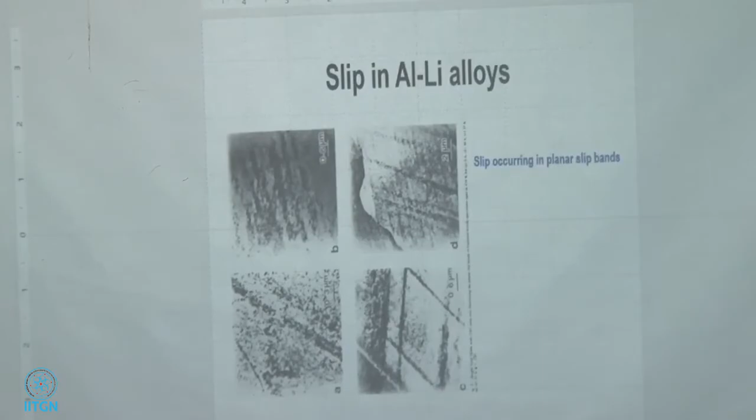Okay. I don't see him yet. Okay, well, maybe, okay let's see, okay that doesn't matter. I mean, well, Shinde is not there. Should I bring this up afterwards? Okay, maybe I'll bring this up after they come. Okay. In the meantime, what I will do is okay.

Aluminum magnesium alloy. So you just brought up the thought in my head. Recently, the 5000 series, 5083, stress corrosion cracking behavior. Because what happened was recently there is a push to use the aluminum magnesium alloys for ships.

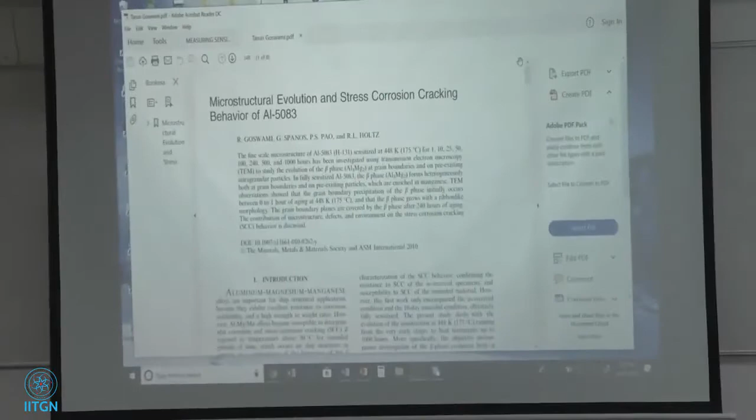This was what year was this? Let's see, I just came to 2011. This study was done by these guys. I'm going to quickly show you some of the things that may be of interest to you. I don't remember everything in the paper, but when you talked to me, I thought I should show this.

Okay, but aluminum magnesium alloys, if you make a ship deck out of 5000 series alloys, they can get very hot. The ship deck, especially in the middle of the ocean, can get very hot and precipitation could progress. So here is the as-received material, just as received, and here is the one that is sensitized. Anytime you expose a material like this to a certain temperature, I think this was 175 degrees C if I remember right. It's been about 8 months since I've looked at it.

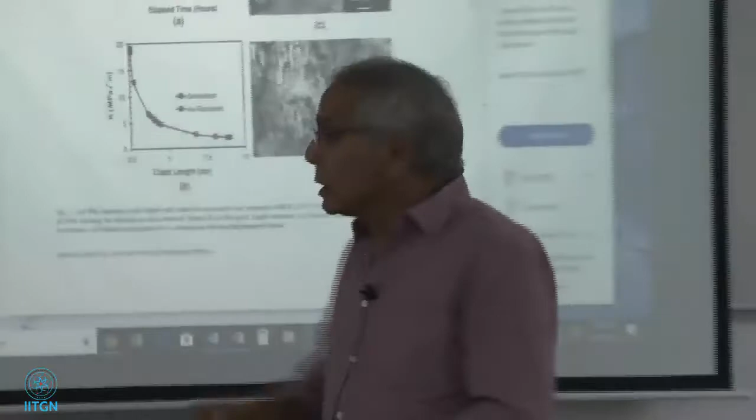Yeah, 175 Celsius, it was exposed. So like I said, when you expose this material to this high temperature, the grain boundaries, the precipitates start to fill up the grain boundaries. So you can see that the crack length is increasing as a function of elapsed time. See how long the crack length is. In the as-received material, that means the material that was not exposed to temperature, the crack length is about 2.5.

And when you do, I don't know what kind of experiments these are, but it doesn't matter. As soon as you have the grain boundary precipitates, because of the sensitization, because of the exposure to temperature, the crack length really goes up. So it could be just a specimen with a small crack, could be a dead load type of experiment, you know.

Fan is too loud, what is that? Yeah, because of the grain boundaries, there are a lot of grain boundaries in the material which are causing a reduction in the ductility. So the resistance to crack growth has gone down because the grain boundary precipitates are forming here at 175 degrees Celsius. So if you take an aluminum magnesium sample and did a crack growth test, just a simple crack growth test, you put it in the machine, put a dead load, and monitor the crack length.

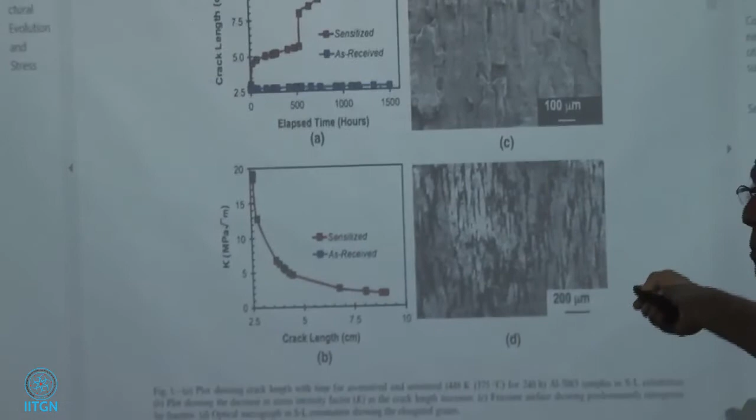Nothing happens in the as-received material, the blue ones. But if I now take the aluminum magnesium, put it in the oven at 175 degrees Celsius for 240 hours, and take that specimen and put it in the machine, the crack length starts to rise because there are a lot more grain boundaries, precipitates. Do you see what I'm saying?

So this is as received, the blue dots, nothing along the grain boundary, clean grain boundaries. This is 175 degrees Celsius, 240 hours. I'm just putting one grain here to show what's going on. Okay, you still have some precipitates, but now you also have these precipitates.

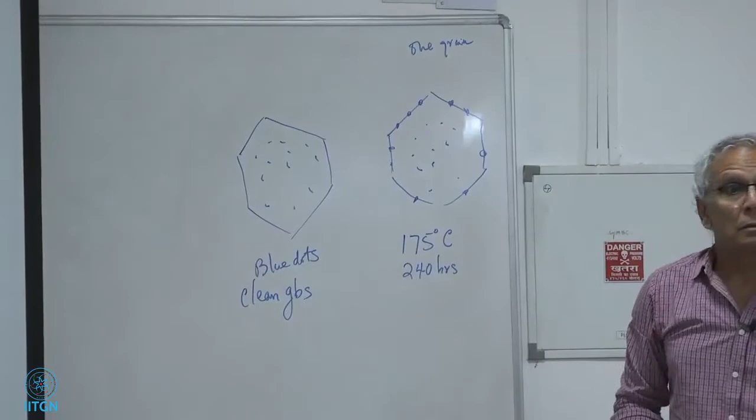These precipitates, yeah, they'll be permanent. Even if the temperature comes down, they will be there. They will stay down there. Yeah.

Well, I have to be careful when I say the word permanent, because if I put it in the oven at a higher temperature than 175 degrees Celsius, they will dissolve again into the solid solution. So it's like this: aluminum, magnesium, solid solution. I take this alloy.

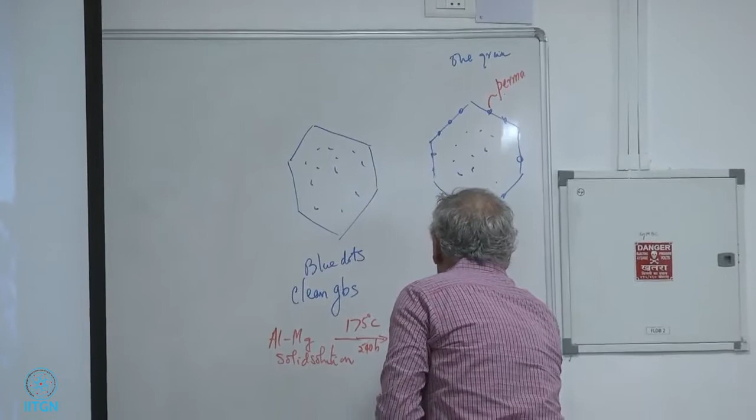175 degrees Celsius, 240 hours. I get the grain boundary Al3Mg2 precipitates at the grain boundaries. That is the chemical reaction that is taking place.

But if I go to 400 degrees C, they may all go back in again because the temperature is too high for the solubility. But if I just cool it to room temperature, they will still stay there. And if I leave it at 175 degrees for 1,000 hours, they'll get bigger and bigger. These will get bigger and bigger.

No, this one is different because one of our lecturers is thinking of working on 5083 alloy. So we had a discussion outside, and I thought I should show him a paper that will be useful for him. So what I'm saying is that 5000 series aluminum alloy has got a very low density, low weight.

So people in the ship business, the Navy, were thinking of using this material for ships. And then the question came up: if in the middle of the ocean, where it is exposed to high temperature for a long time in the sea, what will happen to this material? The conclusion was these grain boundary precipitates will form.

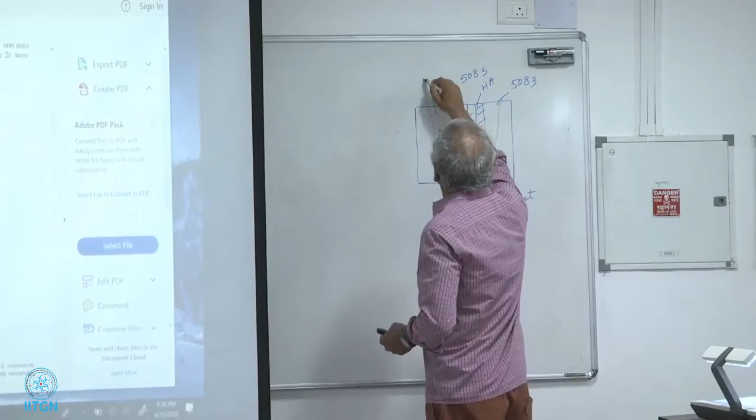Of course, you can draw it like this if you want. It doesn't matter for our discussion.

So when you are doing this, what I would do is put a thermocouple. This is not necessary to put a thermocouple here, I would not- that temperature would be high. But if you put a thermocouple on this side, and see what temperature it goes up to, it will be nice to know what your temperatures are. Then you can forecast whether you're going to see whatever those precipitates are. I'm sure this Al3Mg2 has got a precursor.

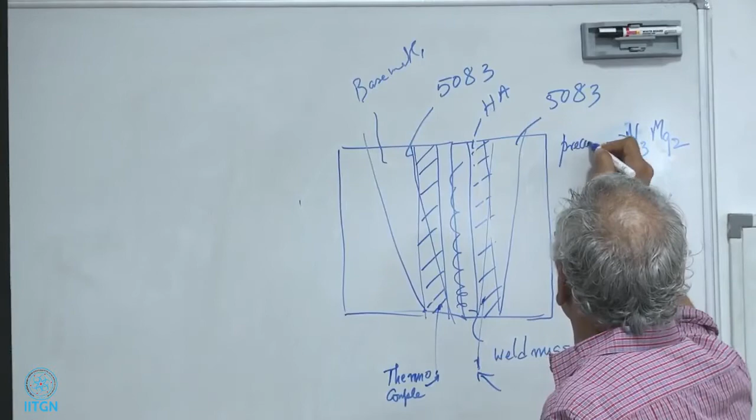So after you do all this, then you take a section, cut it perpendicular to the friction stir weld, FSW axis, whatever it is, 300 revolutions per minute, 5 inches per minute translation speed, whatever is best. You make a section of that, then I'm going to have a section like this with the weld zone or the weld nugget, WN, my heat affected zone. And there is also a thermomechanically affected zone, the TMAZ.

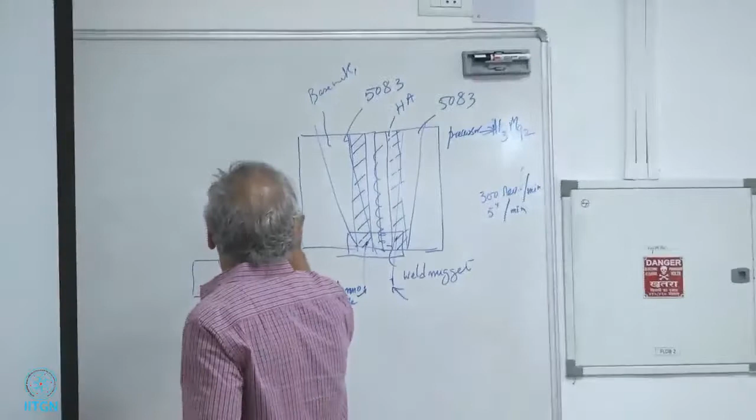Thermomechanically affected zone, I forgot about that. So you've got the weld nugget, thermomechanically affected zone, and heat affected zone. I will document all the precipitates. What are the precipitates here? You probably have a dynamically recrystallized microstructure here.

With no precipitates. I've got a paper on this one. Dynamically recrystallized zone, dynamic recrystallization. So here there will not be any precipitates in the weld zone. The weld zone will not have any precipitates.

After friction stir welding, you want to see where the precipitates are. Are they along the grain boundaries? This is as friction stir welded. So number 2, give the heat treatment.

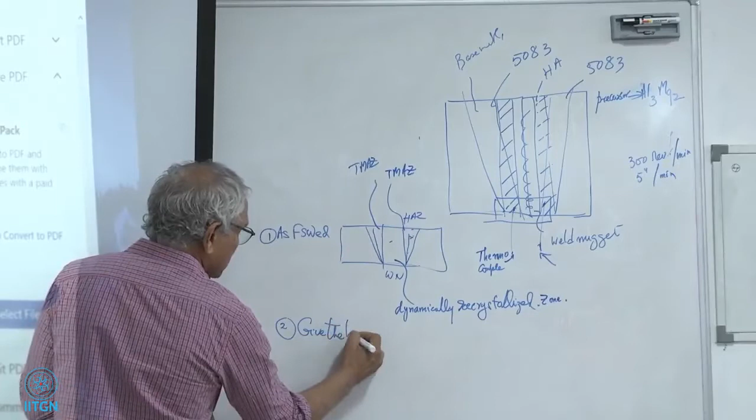Actually, before you give the heat treatment, I don't think you have a residual stress measurement. Then you can choose the heat treatment so that you can relieve the residual stresses, but at the same time, they will be forming grain boundary precipitates in this heat treatment.

When I say look at the grain boundaries, I mean image the grain boundaries. And then you can throw it in the salt bath, whatever you want to do afterwards. But that's the main thing. That's the main part of the whole problem, right?

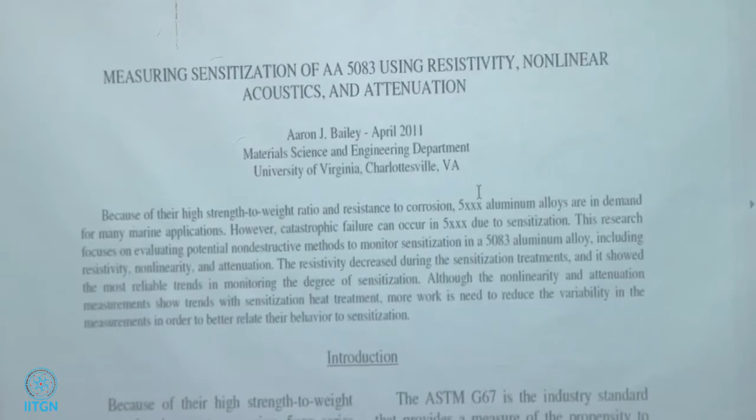See, okay, I'm trying to see if there's a figure here that will help you. Okay, that's good enough.

So then if you're interested in corrosion, you can take that one sample, small samples. You can cut a lot of samples actually, and put them in salt, take it home, mix some salt in water and throw it there. Just look at it every day, how it looks. Take pictures of it, you can do that.

So you were saying something, Chandraji? What you said about putting the salt... yeah. Right, yeah.

Everywhere 5 series alloys. Bulk of them is 5052. This is a newer alloy, 5083. Yeah, new alloy. The application is... a lot of 5000 series.

Good point. What will be the effect of the precipitates at the grain boundaries? Yeah, that's what we talked about, right? The crack growth, the cracking length increases.

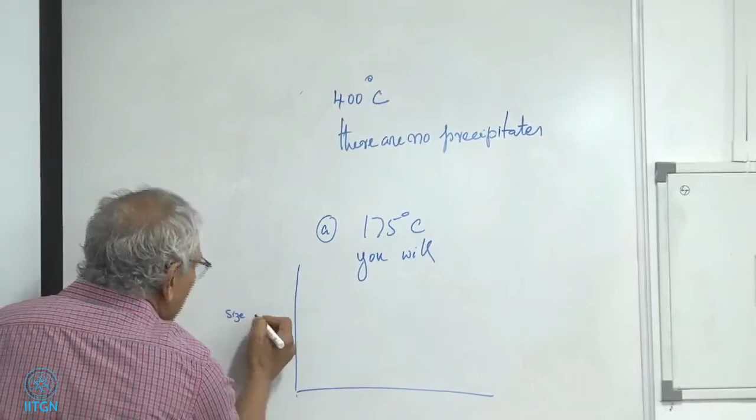Size of the precipitate - size and number, I don't know which one will change. Size and number of the precipitates, volume fraction, area fraction.

At grain boundaries, as a function of time. And I'm heat treating this at 175 degrees Celsius.

Like Sir said, this is not actually an age hardenable alloy, it's a work hardening alloy. But this can happen. This happens. That's what we saw.

So at time 0, there are no precipitates. Nothing. Then slowly the precipitates form - I'm doing it at 175, maybe 10 hours. I don't know which way the curve will go. That's what will happen, okay?

Yeah, either they may grow or the number can increase, right? So the magnesium from...

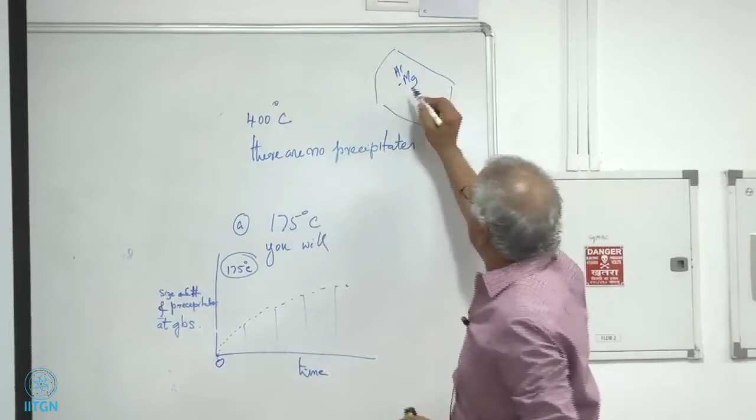There's my grain, these are my grain boundaries. My grain has got aluminum magnesium, okay? But at this temperature, my magnesium is diffusing to the grain boundaries. And it's forming Al3Mg2. So the magnesium is coming out of the solution. It's diffusing much faster than aluminum, and it's forming Al3Mg2 precipitates.

So anytime - well, I don't want to make a general statement, but in this case, they are deleterious to the material. They're bad for the material.

So we showed, right, crack length? Yeah, we showed that the crack length goes up. Yeah, so we showed the graph, right? We just saw the graph.

Yeah, that is Al3Mg2. That's intermetallic, yeah. Oh, yeah, absolutely. Absolutely, it has to.

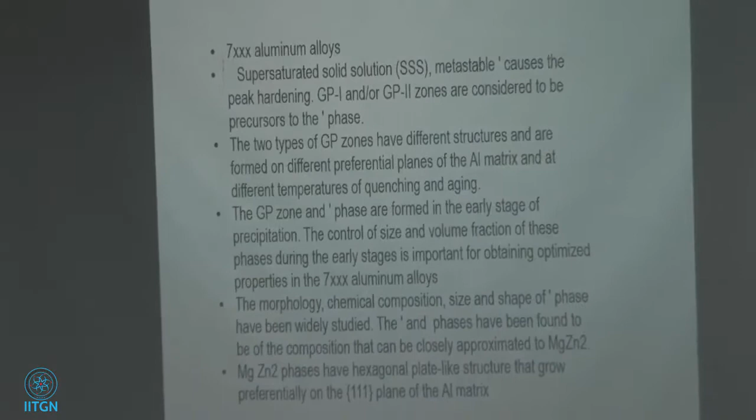So this is completely different from 5,000 material. This is 7,000 alloy, 7,000 series, which is a little bit different. This is a precipitation hardened alloy. So this alloy becomes harder, becomes stronger because of precipitates. That's how you do this, okay?

Right. So this also goes back to the question you were asking, right? So here is my supersaturated solid solution. That means all the elements, aluminum, magnesium, zinc, copper, those are the main elements. 5.8% zinc, of course it won't be exactly the same, but a little different, 2.28% magnesium, copper. As long as you remember it's aluminum, zinc, magnesium, copper alloy, that's enough, okay?

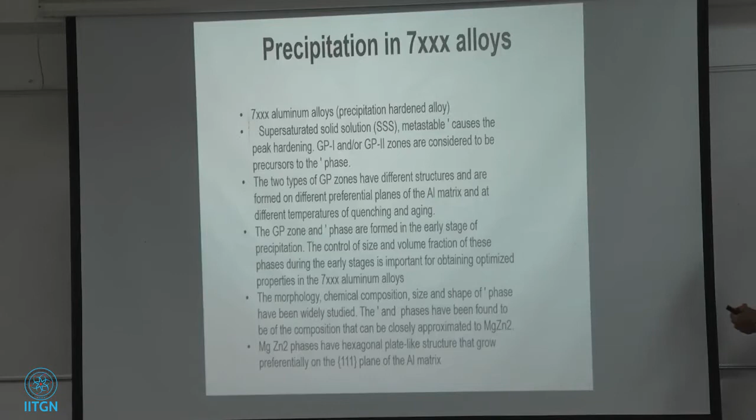I'm losing my mind. Oh, there it is. So we are doing supersaturated solid solution. Let us say we heat treat this at 120 degrees Celsius for various lengths of time, just like we did before. Hardness versus time, or this could be yield stress, or anything, whatever you like. Okay, that's the curve, right? Underaged, peak aged, overaged. Yeah.

So here, just before, the GP zones come out, GP1 and GP2. These are Guinier-Preston zones. They're really not precipitates, but they're a collection of atoms, maybe 15, 20 atoms, okay? They're forming the nucleus for the next precipitate. They are considered precursors to the eta prime phase. Okay, this is all fine. Size and volume fraction changes, fine. That's all fine. This is the eta prime.

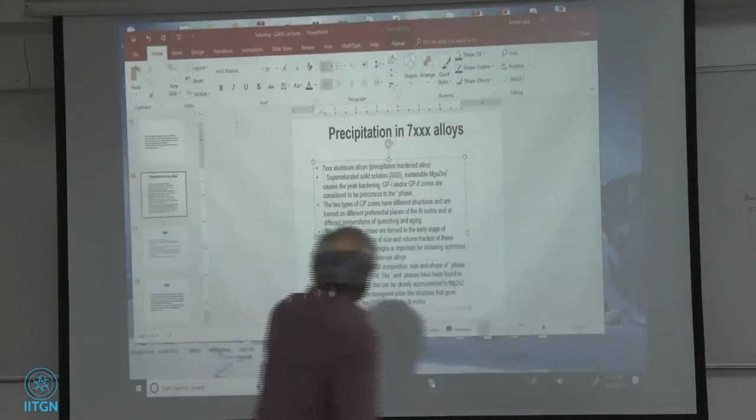And the only thing is, this is important, they're hexagonal plate-like structure and forming on the 111 plane, because that happens to be the slip plane for aluminum. Okay, so they're sitting on this slip plane. Remember always, 111 is the slip plane for aluminum alloys, all aluminum alloys. 110 is the direction, slip direction. All FCC materials.

So it so happens, aluminum alloys, or that 7000 series, let's stay with that, 7075 or 7050 or something else, have the highest yield stress at peak aged. Right? Corrosion, stress corrosion cracking, not the best.

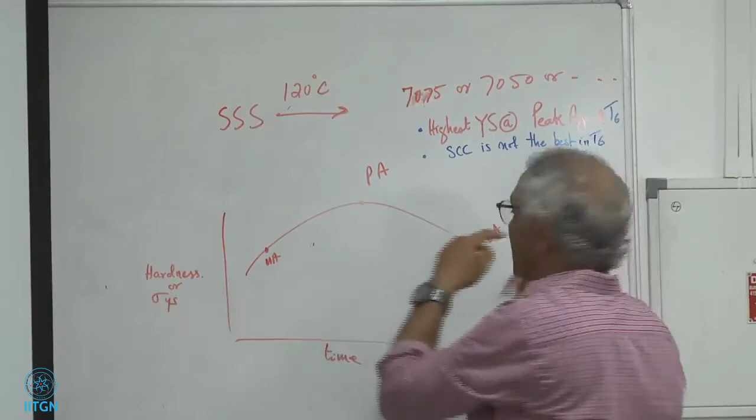Let's call this as T6. In T6 condition, this is my T6, peak aged is my T6 condition. Okay, my yield stress is very good, highest, great. My hardness is high, my yield stress is high. Okay, but my corrosion is not good, my stress corrosion cracking is not good.

Let's go here, okay, overaged. In the overaged condition. Oh, I'm writing too small. Overage condition, yield stress is lower. Huh?

But my stress corrosion cracking is high, I'm going to show you later on. So here my yield stress is high, stress corrosion cracking is low. Here, my yield stress is low, but my stress corrosion cracking is high.

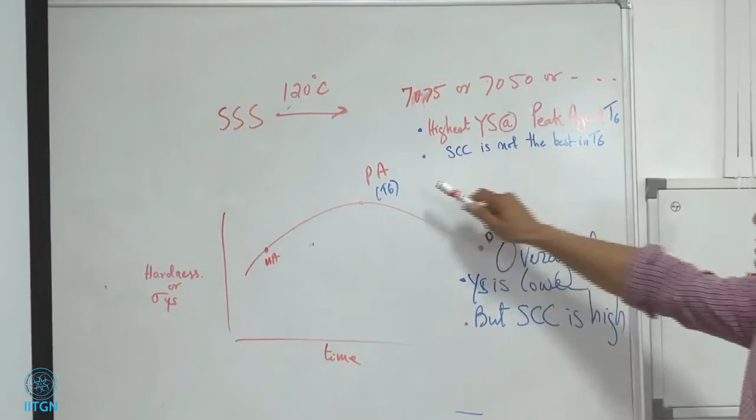But I like to use, as an aircraft guy, I like this. A lot of my products, I want these. But the stress corrosion cracking is bothering me, you know? So what I do, either repair or I go for replace.

Because in a cargo plane, there are big longerons. This is the floor of the airplane, and there is my fuselage, top of the fuselage. There's a big thing that's longeron. It goes from the bottom at a slope and it holds everything. It's like a stiffener, essentially. Big longeron, it's very big. I think maybe 3 or 4 floors high, depending on which cargo plane you're talking about.

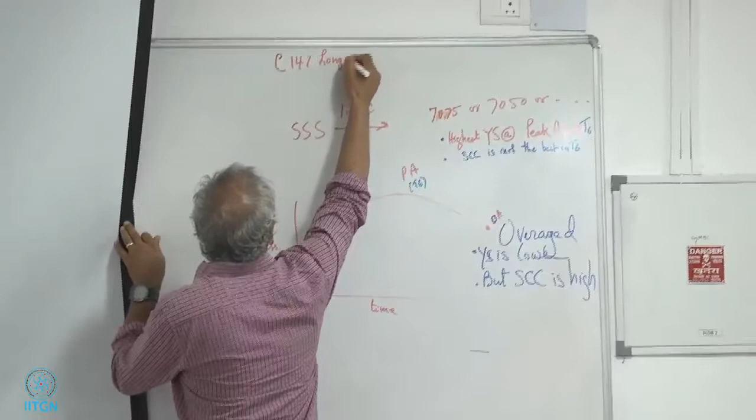It is in this condition. I will give you the reference, maybe you can look it up. C141 longeron. Maybe put something like corrosion studies or something. Google, you'll find some paper, I'm sure.

So this problem was there before for a long time.

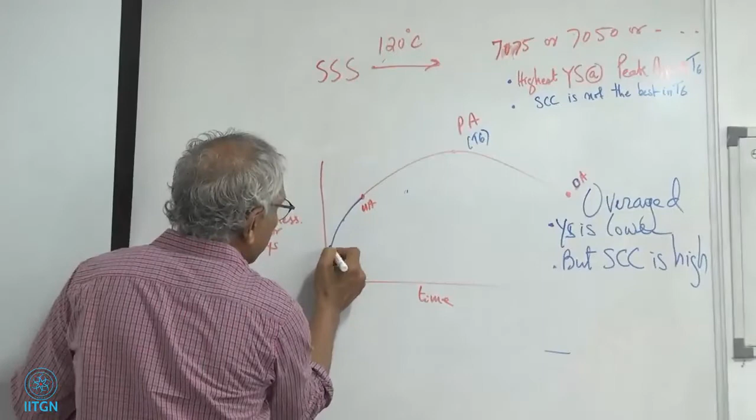Which region is GP2? Oh, GP zones, yeah, below that underaged. Yeah, same, they're all here. So I would say right about there, GP1, right about there, GP2, right about there.

Mg3Al2, which is coherent precipitates. Okay, same precipitate, semi-coherent. Same precipitates, incoherent. So GP1, GP2, magnesium aluminum phase, which is coherent. That means the atoms are matching up with the matrix.

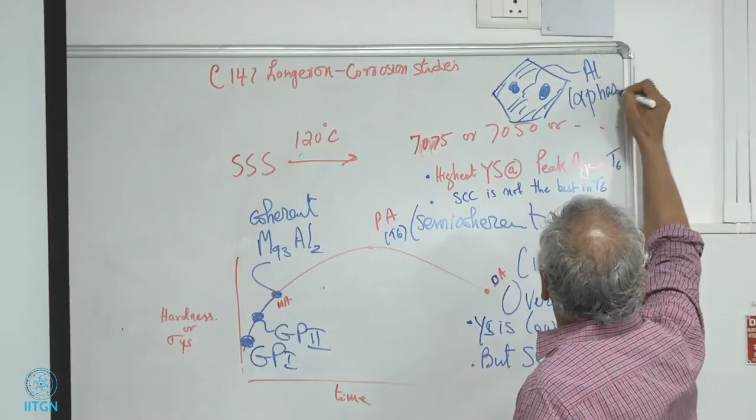So if this is my precipitate, this whole thing is aluminum, and we call that the alpha phase. That's the nomenclature. We call that as alpha phase, the aluminum, the background aluminum, this floor.

And on top of that, we have the phases. These phases we can call beta. So GP1 and GP2, we don't give it any names because they're very early stages. You need a very high resolution microscope to look at them. But the first phase we start to see, we will call that beta. Just imagine there is another phase that comes after this, something else comes after this. It doesn't happen in this alloy, but if there is something else that comes, we will call that gamma. So alpha, beta, gamma, we keep going and going. But alpha always refers to your parent material.

So there's a guy in Israel, Sina. I'm going to erase this because I need more room.

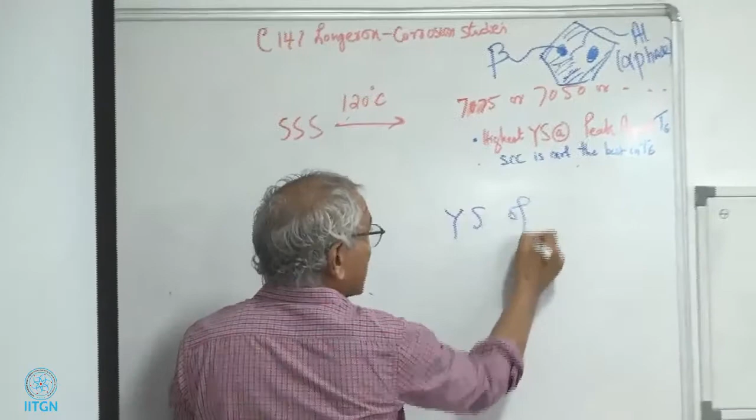So people were working as to what is that we can do so that I can have the yield stress of T6. I can also have the stress corrosion cracking resistance of T7. How can I combine these two, and make one heat treatment? That heat treatment we call retrogression and re-aging treatment. That's what we call as RRA in the aluminum literature.

So this is around, I don't know, Cina, maybe 70-something, 75, 78. Oh, this is a much later paper, this is 1998. Let's look at the original paper if you want to read it. Patent, here, B. Cina. His patent is 1974, US patent, Cina, C-I-N-A. So if you read that patent, you'll get a better explanation than I can give you on the retrogression reaging, because he's the guy who came up with it.

Okay, so RRA is a multi-stage heat treatment. It's not actually multi, it's two-stage heat treatment. Well, maybe three, okay, we'll see.

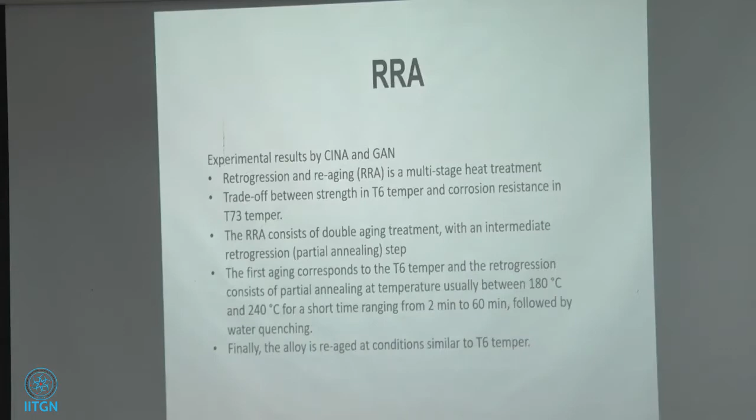So the RRA consists of double aging, two aging treatments. So what do I do? Actually I got a figure for that, I made a figure for you, just for you. Here.

So the commercial 7050 aluminum alloy. So I go through all this. So here, I'm here right now, which is

solution heat treatment, SHT. So today we're not going to break till I finish these slides. No coffee and no tea. Maybe I want cookies though. Okay, so now solution heat.

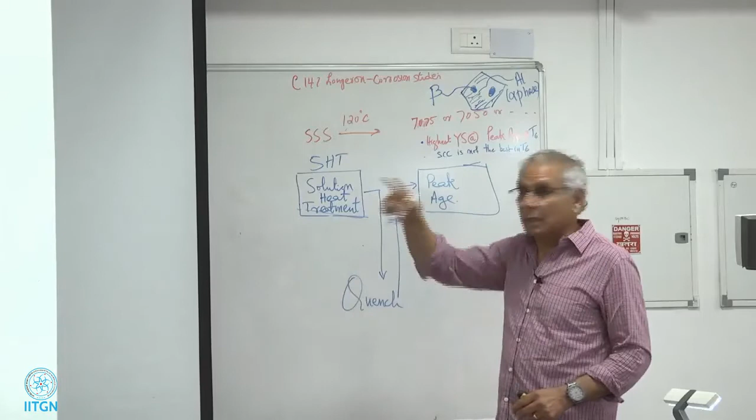Solution heat treatment, we quench it in ice water, ethylene glycol, whatever. And then we go from here to peak age. So we heat treat the material, we quench it, we go for the peak aged. I showed you that curve, right? So you know how long you should keep it in the furnace at that temperature.

What is that? Oh, yeah, okay, air is okay. You know, air is okay.

It's been so long, I'm trying to think. Highly agitated water, for quenching, yeah. Oh, I'm sorry, I thought you meant heat treating. For quenching you want very agitated water if you have a big piece, because your center will not cool as fast as the surface.

Especially if it's this big, right? But if it's this big, no problem. The surface will cool faster and the middle will not.

Actually, there was a problem one time I remember, back in the late 80s: soft zones in aluminum alloys. That's what we called it, because they were not quenching it right. The middle portion was soft, the upper and bottom portions were hard.

You learn by mistakes, so a mistake is not a bad thing. Without a mistake you'll never grow, right? How many times did you fall when you were young? Okay, right?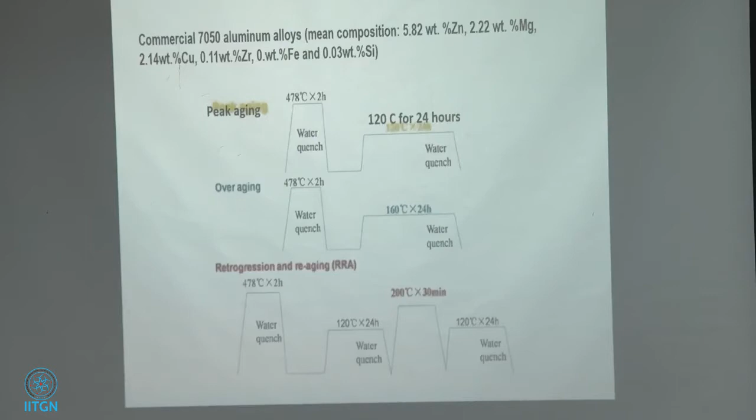But if it's titanium alloys, and you air cool it, you'll get completely different results from furnace cooling and water quenching. In water quenching titanium alloys, you'll get titanium martensite. With furnace cooling, you'll get very coarse precipitates. Air cooling gives you finer precipitates, naturally, because you're cooling faster.

Yeah, for most of them, for 70-75, definitely it has small differences, but it's the one used all the time in aircraft for high strength. But sometimes people want corrosion resistance, then they use that 7050.

Did anybody check to see if they can pick it up here? This, in Google, C141 Longeron corrosion. So for something like that, this is a big beam, it's 3 or 4 floors high. Some of these cargo planes are very big.

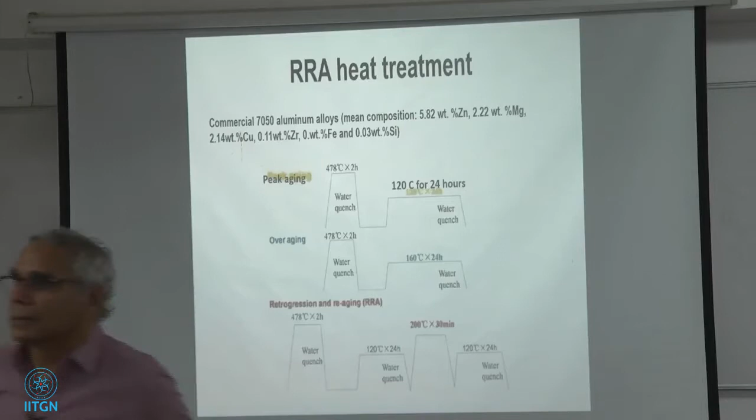Yeah, how to put the thermocouples? Oh, Pankaj here, who put the thermocouples on the friction stir weld? Mahesh? You put thermocouples on the friction stir welded? Amit? Amit did it. So you basically drill a very thin hole and put your thermocouple there, but you have to have very good contact. Talk to Amit, the guy in the green shirt, the smart guy. Amit will tell you, right Amit? Yeah, he'll help you out. That's the only way you can learn, because he has already done it. There's no point in you going and trying everything and spending another month. He's going to tell you quickly what to do, so you just have to be nice to him, take him out for lunch or something. Okay, so that's that, right?

So here, after you do the retrogression re-aging, you don't have to do a whole bunch of tests. This is work done by somebody, usually I'd put a reference here, but I can tell you what it is. So here, look at it.

The black is the peak aged. So this is stress, strength versus strain. Stress-strain curves in air and in sodium chloride solution. Let's look at air. This is after you do the retrogression re-aging, okay?

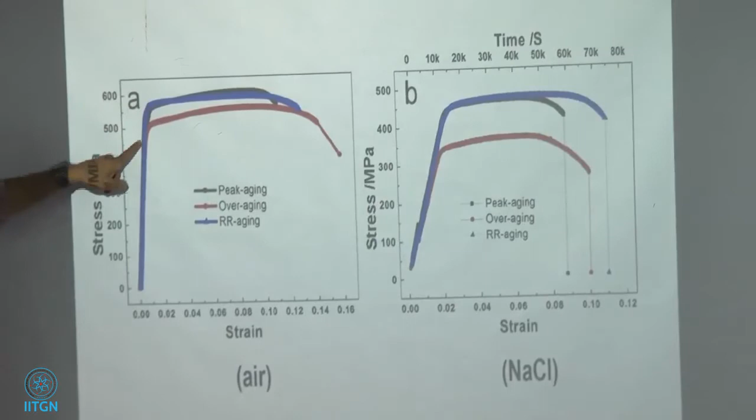There is your peak aged, there is your retrogression re-aging, there is your overaged. Right in between, just about, and you got the same strength as T6. You got the same strength, right? The yield stress is right about there for the black line, which is peak aged.

And overaged is here. So you have improved the stress, improved the strength by almost 75 megapascals. This is about 500, this is about 575. You have almost improved 75 megapascals. That's pretty big, 75 divided by 500, right? Or about 15%.

Okay, let's look at the strain in sodium chloride. That's a better indication because that's corrosion. This is corrosion, right? Sodium chloride solution.

The overaged, yeah, peak aged fails there. The peak aged is failing at this strain, right? The overaging is failing at this strain. But look at retrogression re-aging. Wow, there.

Beautiful, so your experiment is good, right? I mean it's good, you have produced, by using retrogression re-aging, at least on the lab coupons, a strength as good as T6 and as good as T7 when it comes to corrosion. Just by using a double age treatment where you left the matrix precipitates as they are so you can get the strength, okay? And you refine the grain boundary precipitates by the retrogression re-aging.

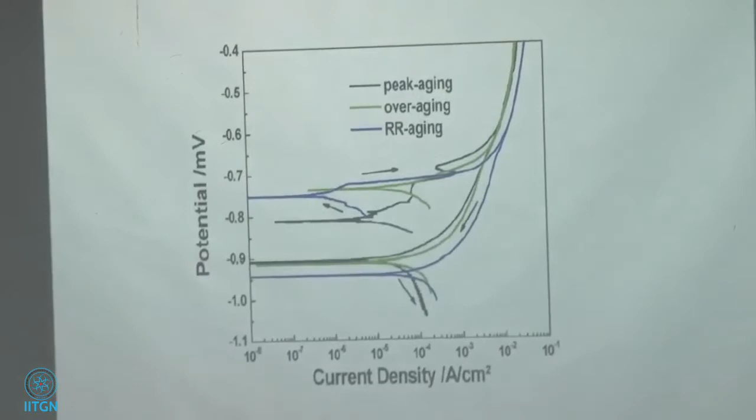Okay, look at these lines, I'm going to show you. Let's take one first, peak age, right? Let's take the peak age, the black line. So it goes, doesn't matter that way or this way. Here comes this way, okay? Black line, or this way and then this way. Yeah, this current... one second, is it backwards? Okay. Peak age, overage, yeah. So look at the top ones first, look at the current density first. Let's look at the current density. Higher the current density, more the corrosion. Always, always, right?

Corrosion is proportional to current, always. You can use current density if you want, and actually if you're comparing different alloys, you want current density. So the higher the current, the more the corrosion.

Here the scale is set up so higher current is to the right, lower current is to the left. So this one is the worst of these three.

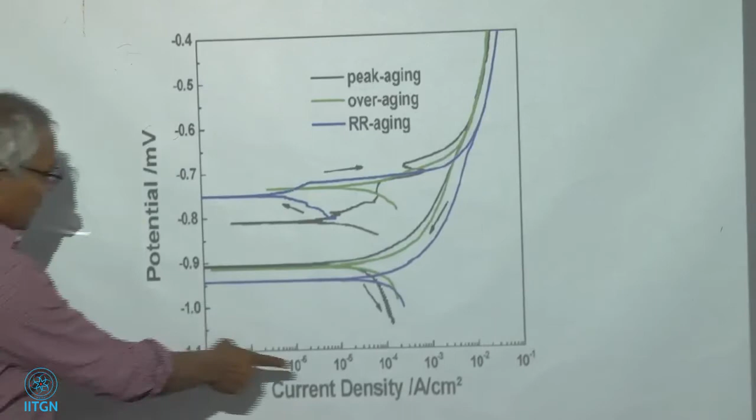If you have a bad alloy that's corroding, it will have high corrosion, like 10 to the minus 5. If it's getting better in corrosion, it may be like 10 to the minus 8, three orders of lower magnitude current density. So lower current density, the better the corrosion resistance.

I'm not too happy with this. If I'm the reviewer for this paper, I will say get your measurements again. It's not completely right, no, I'm serious, it's not completely right.

Okay, I'm going backwards here also.

Let's look at Rick Ricker's work. This guy's a good guy, Rick Ricker, very good in corrosion. So this has got nothing to do with retrogression re-aging.

5,000 series and 7,000 series, doesn't matter. Let's take one alloy and understand what it is.

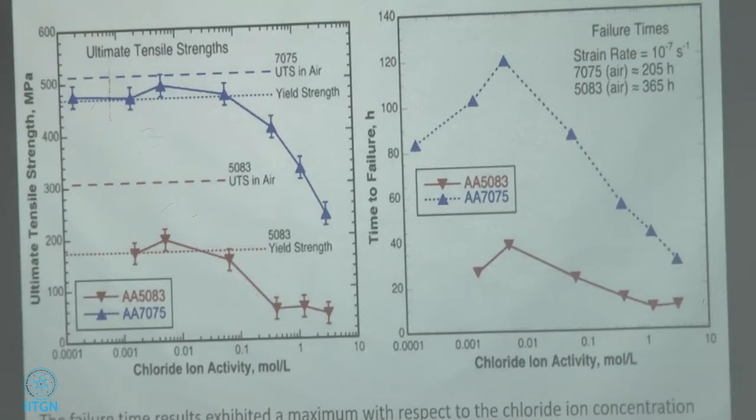And here are the failure times. This is strain rate at 10 to the minus 7. It takes a long time to do a test at 10 to the minus 7. Many of the tensile tests we do in the laboratory are at 10 to the minus 3 per second, that's the strain rate we normally use for a tensile test.

But if you want to see the effect of environment, like chloride ion concentration or relative humidity, those are the two that come to mind for aluminum. For titanium, maybe it's methyl alcohol or something that attacks it. You have to run it at a slow strain rate so there's time for the ions to react, so it goes up and then comes back down, exhibiting a maximum with respect to chloride concentration.

There is a transition from pitting corrosion to passive corrosion as the chloride ion concentration changes. No, I'll change this sentence, I don't think this is right. So here there is corrosion going on, pitting corrosion, but then at this point you have a passivating layer.

If I have a piece of aluminum and a passivating layer forms on it, aluminum oxide is a passivating layer, titanium oxide is a passivating layer. That means it's a very hard layer which the chloride ion cannot break that easily, but of course it will break it eventually. That's a barrier, it forms and then it goes away. So up until here it's going up, but then I think there's a passivating layer that forms.

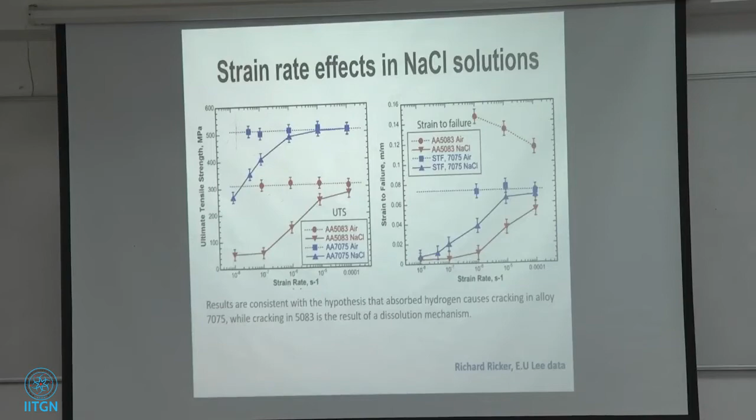So are you saying maybe... no, I know, he knows that. No, I see what you're saying. What he's saying is at high strain rates, there's no effect, and there's no time for the reaction. That makes sense.

Which one? They do get affected actually, but oh I see, compared to the other materials, they don't get affected that much. Yes, I see what you mean. Sorry it took me so long to understand.

Yes, it is worrisome. That's why we're very worried about stress corrosion cracking in 7000, 7075 always, because many of the components out there are 7075 T6, almost all of them.

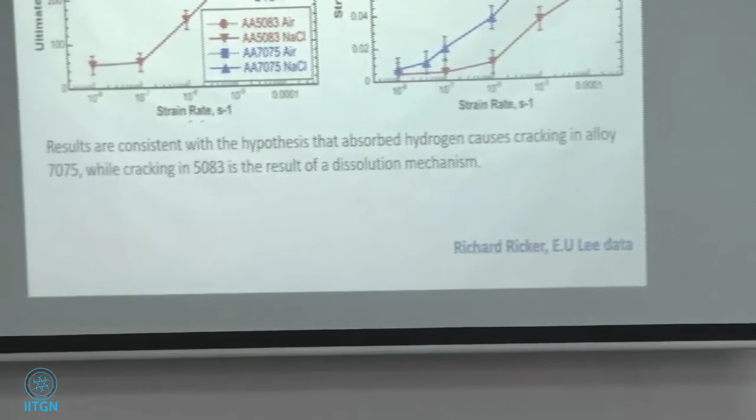Maybe you may be interested in the fracture surface. So the bottom one, I didn't write it down, but this is 5083. So this is the surface, this is the fracture surface, okay? So there is the sample, tensile sample, there is the fracture. You make a section like this, perpendicular to the fracture, and you take these pictures.

There is my tensile sample, for instance. There is my fracture. So I take this fracture surface, and I make a cut like this, and look at this plane. So that plane is perpendicular to the fracture surface. Okay. So that way you can see what is going on below the fracture surface. Exactly, right?

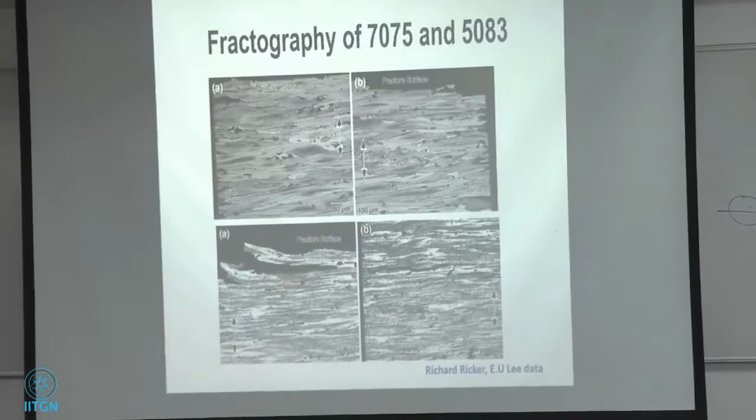Yeah. Right. So big intergranular cracks. At first I thought it was exfoliation cracking. You know, exfoliation is also one of the corrosion forms. But I thought that is exfoliation, the way the grain lifted up. But Rick says that it is not exfoliation, so it must be right, because he's the expert. Okay, but I think it's whatever it is, but you can see how long it is. This is 100 microns, 0.1 millimeter. You can see that's a pretty long crack right underneath the fracture surface.

And you can also see there is a crack right there beneath the fracture surface. This is for 7075, this one. So actually, let me write that down, because once we put it in the book, you will not know which one is which.

Insert, 7075. Change the color on that. Yeah, I can put white, but will it be okay in the print? Amit, if you put white there in 7075, will it be okay in the print? It should be, right? It should be okay.

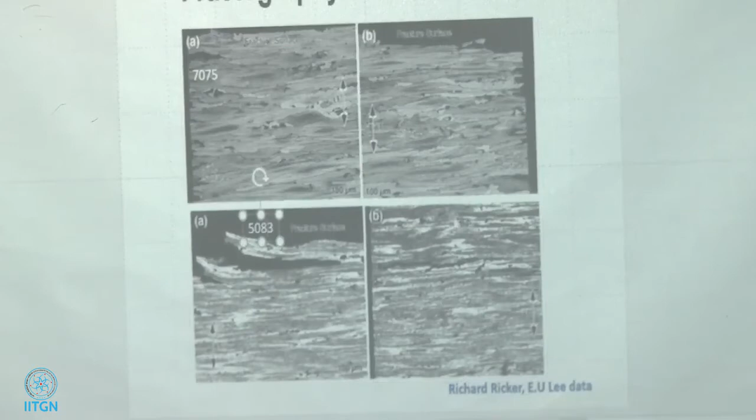So, 83, let me put it here, black against white. Okay, so this. Okay, so basically, yeah, that's what we have there. Okay, you can read this, no big deal.

Ready, Garu? Ready. So here is the slip bands, dislocations in slip bands, for the fracture toughness model, okay, just a schematic. Wide slip bands and low slip band width and spacing for underaged. For peak aged, larger slip band spacing and narrower slip band width. Okay.

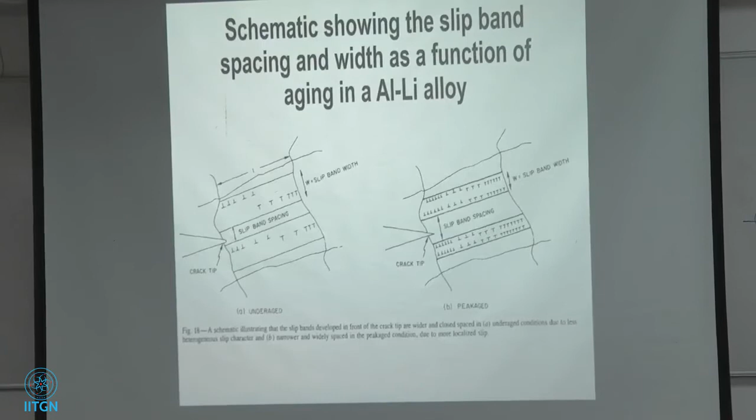So here is the model. I just kind of put more steps in here. So this is the crack. Don't pick my mistakes here. So here is the crack opening displacement, okay? In front of the crack opening displacement, number of dislocations times Burger's vector. Alpha is the inclination of the slip band. On that slip band, you have n dislocations times Burger's vector for each, okay? This twice comes because you can put 3, no, you can put 2, okay, that's fine.

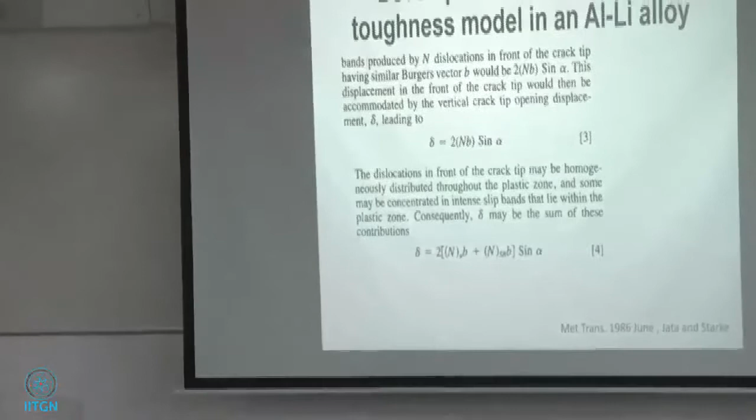And then these slip bands, we divided them up into 2 parts, okay? Some of them are homogeneous, some are heterogeneous. Because not all dislocations are in the bands. There are other dislocations too. You have to consider both of them. You see what I wrote there, the paragraph, right? The dislocations in front of the crack tip may be homogeneously distributed or heterogeneously distributed in intense slip bands, right?

We'll be done in 5 minutes. Yeah, sure. So we'll be done with these few graphs today. Okay, so that will be the crack tip opening displacement. And then the density of the dislocations, number of dislocations, right? Divided by length of the slip band, W is the width of the slip band, okay? I'm glad you guys are all agreeing. Okay, several people have agreed with it, so. Yeah.

So density of these dislocations and all this stuff. Anyways, we come up with this, then we go back to our crack tip opening displacement, which is K squared divided by Young's modulus, times yield stress, and we come to this K1C equal to, in terms of dislocation, slip bands, widths, and all that stuff. So I put everything down here.

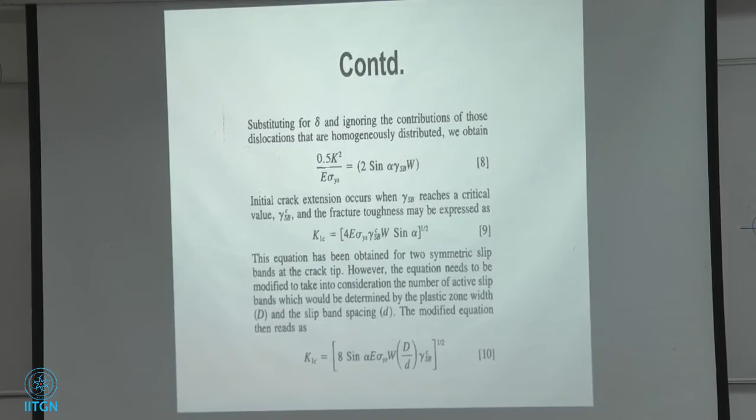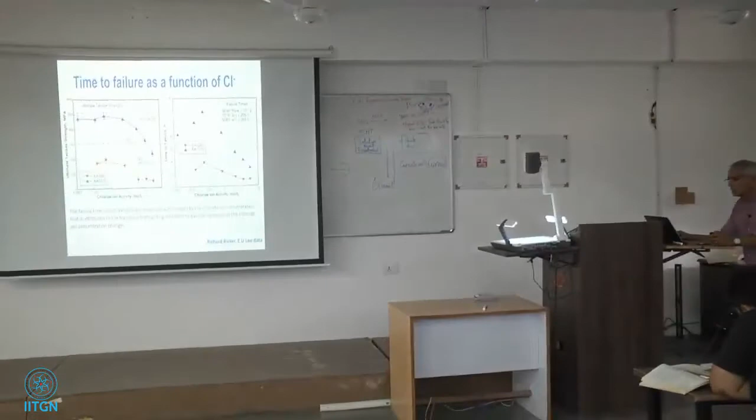Okay, I just wanted to put this in the binder. I think that's all - those are the loose ends from yesterday.

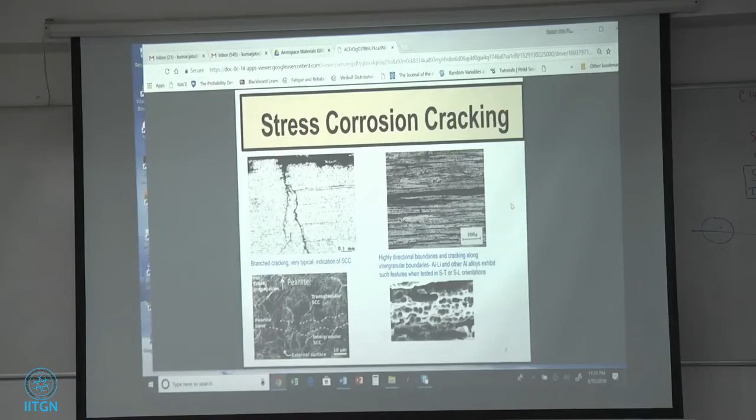We have somebody coming from American Society for Metals. They want me to give a talk on nickel-based superalloys for 2 hours. So you're the guy who's asking? No. No, I don't know, I'm okay. No, that's good. Yeah, so be here on B Square on Monday morning. There are some ASM people - I think they made a request to Amit. So we'll discuss 2 hours Monday on nickel-based superalloys.

I think I'm going to have the same format - well, not same, I don't have a format right now, but we'll have processing, microstructure, fatigue, and all that, but mostly from an application point of view. Like blades - superalloys are mostly castings, and then wrought materials, they're not castings, they're for turbine discs and other things. Turbine discs, that'll be good. I'll take those two examples and build a story around it. And then equiaxed, directionally solidified single crystals, and then different solutionizing elements. Again, what are precipitates, what are grain boundary particles, and a little bit of repair - that's actually a very important thing for nickel-based superalloys, because the parts are so expensive you can't just throw them out, which we do. So the question becomes, as Kumar is asking - Dr. Kumar, what's your first name? Jalaj, right? Yeah, as he's saying, those are important things.

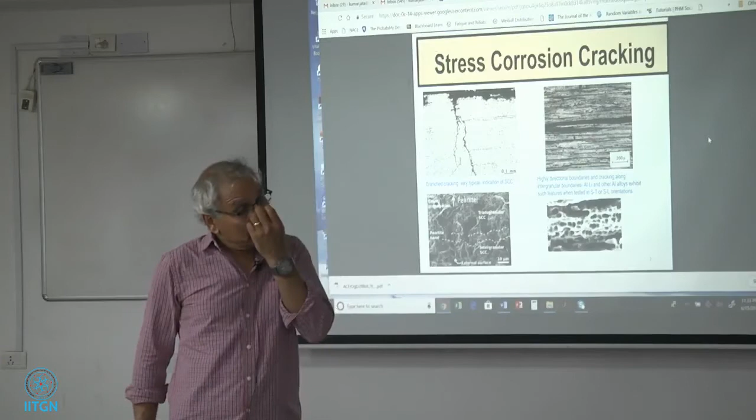So this is the last bit of corrosion - I mean, I have a lot more corrosion to talk about. Oh, coatings, maybe we'll talk about at some point, a little bit of coatings. I think we can talk about at least what's going on in the world with respect to coatings development to stop corrosion, or to protect structures from corroding, because we cannot stop corrosion - you can try all you want to.

It's not going to happen. It's tough. But maybe we already did this, I don't know. Maybe some of this is repetition, but it's okay. It's okay to revise things.

So, as I said, stress corrosion cracks are always branched. That's how you can tell the difference between a stress corrosion crack and other cracks. So again, this is the fracture surface, okay? We made a section like this, and we're looking at it like this. And we also set these kinds of boundaries - the straight boundaries are no good when it comes to stress corrosion cracking.

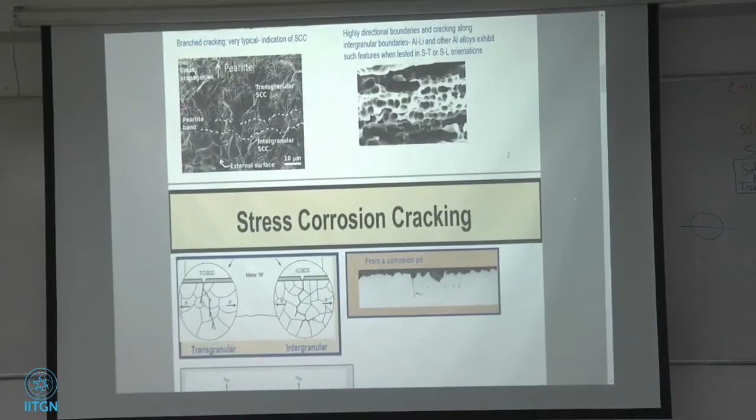Yeah. Yeah, that's fine. Desktop is fine. Okay, that's PDF, but that's okay. Yeah, that's fine. Yeah, that's good. No problem. Actually, there is a little square, it's not visible. It's probably at this corner here. Yeah, just... it'll go away, it'll go away. I mean it'll go away. Yeah. I'll go up again one more time. Thanks, thank you, I'll go up again a little bit. Yeah, that's good, better, right? Very good, okay.

So whenever you are working with materials which have got these grain boundaries like this, you have to worry about the stress axis along this direction. You really have to worry about it because these grain boundaries are perpendicular to your stress. Once the crack starts, there's no way to branch out. It's going to go right along these lines. Okay?

And that happens in... alloys that are commercial type of alloys. Yeah. Right.

So a lot of times what we do is, if this is your fracture surface, we put something on top of it to protect the surface from deforming when you polish it. What do you put? Nickel plating. So you have to put a nickel plating here, and then polish it, so that you avoid the rounding of the surfaces.

You're going to say something, or okay? So yeah, nickel plating. Can you nickel plate any material? Can you nickel plate any material? Any? Yeah, yeah, what is the... Yes, madam. Okay, she's authority. Okay, we've done everything in DMRL. I agree, you guys are good.

So here is an interesting fracture surface of an overaged aluminum alloy. Remember what we said in the overaged condition - we have precipitates on the grain boundaries. In a precipitation hardened alloy, we have precipitates on the grain boundaries. So when it fractures, you see these voids on the grain boundary. This is a grain boundary, actually.

You can only tell if you're doing many of these. So don't worry, I cannot tell if it's an intergranular fracture or not, but if you do many of these in that condition, eventually you'll find out - oh, this is a grain boundary, and these are coming from the grain boundary particles. So this is an intergranular microvoid coalescence, IGMVC.

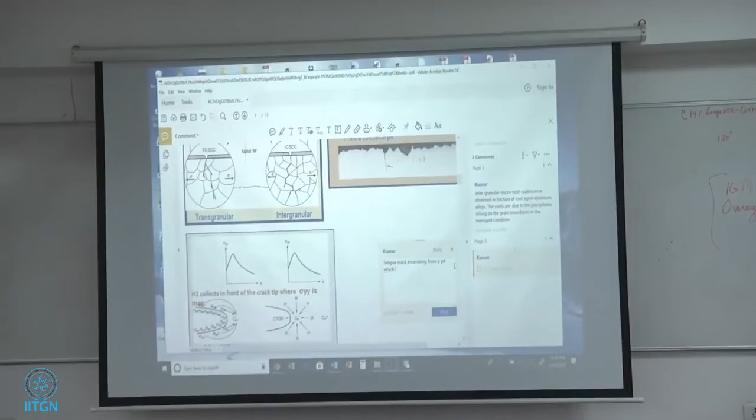I was going to write something here, I'm just going to write it down anyway, something I had in mind: fatigue crack emanating from a pit, which will lead to failure if the above is under cyclic fatigue load, right?

So this is something on hydrogen embrittlement. Where is our hydrogen embrittlement? Right, so here we have a crack, it's just a schematic, I'm just showing you a schematic. There is a notch or a crack, and let's imagine there is some hydrogen, even coming from outside or internal, doesn't matter. Right in front of the crack tip, all this hydrogen will collect because of the elastic field.

There's always a question that comes up on the exam: hydrogen is an interstitial atom, where is it going to go and reside on a dislocation? Because if you put a dislocation, right, there is my dislocation plane. So there is my dislocation, this is my dislocation line, right? And this is the tension side, this is the compression side. I hope I'm right, check it out.

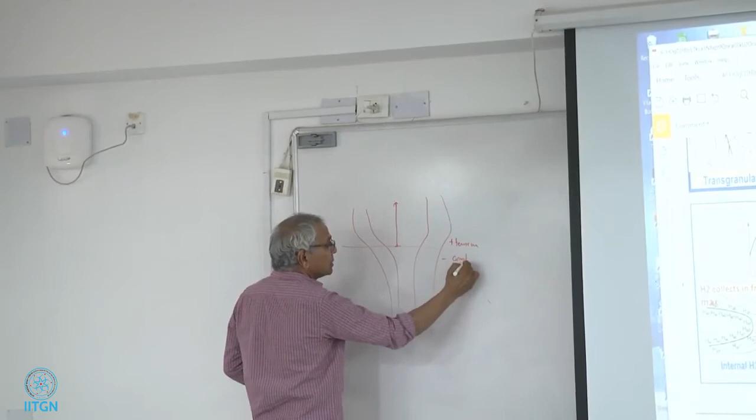So if I have the hydrogen, will it go and sit? Okay, these are all the lattice points, atoms, right? So where will this hydrogen go and reside? Will it go on the tension side and sit somewhere, or will it go on the compression side and sit there?

A favorite question, always. I won't give the answer right now. I'll let you think about it, and then we'll have an answer afterwards. I'm not expecting you to think about it right now and tell me. I'm just telling you that's a very popular question people ask.

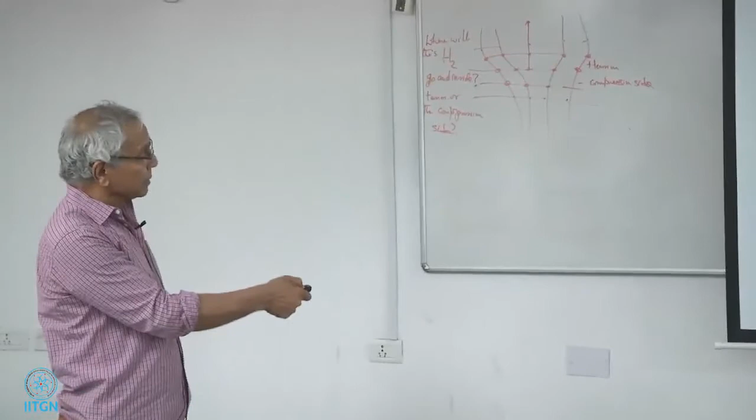So here we are. There's the maximum stress in front of the crack tip. So whether it's internal hydrogen, remember we talked about yesterday. If I have a sample here, and my sample has 100 parts per million of hydrogen macroscopically, right in front of the crack tip it will be much more than 100, because the hydrogen comes from everywhere and sits at the highest stress level. So even though it's 100 overall, here it may be 300, 500, and I can have hydrogen embrittlement. But if you don't have stress, it will all stay at 100. If you have stress, it will all collect there and become much more.

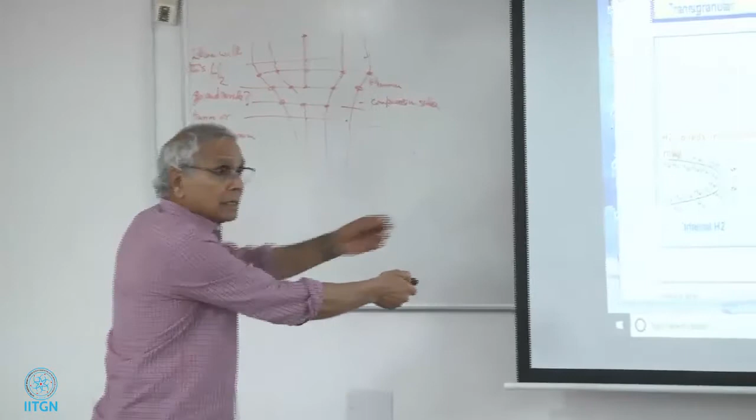And there is an equation for that actually. There's so much material out there on this. Same thing even if the hydrogen is coming from outside - the crack tip will attract the hydrogen from outside and it will all collect there, again concentrating. That's because this lattice structure is going to experience the stress field from the crack tip, and the hydrogen sitting there will reduce the cohesive energy. This bond may break, that may break, so you can have hydrogen embrittlement. Makes sense?

So I thought I'll put this up there - we just saw something like this, right? This is a very popular test we always do, instead of going and machining fracture mechanics samples right away, which are very expensive. For instance, Shinde, in your case, you're doing the epoxy patch on 6061 aluminum. You can make samples like this, or take that 6061 with epoxy patch and expose it to sodium chloride, and see how well the epoxy patch functions in a sodium chloride environment, because that's very important for repair work.

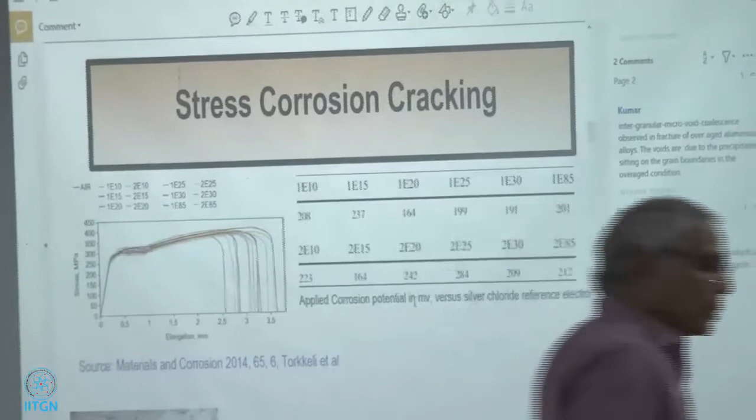I also see one more thing here - you can also do these tests by applying a potential to the specimen. This guy has used silver chloride as a reference electrode. You can have a hydrogen electrode, or a silver chloride standard electrode, and put a potential. So I have my specimen, and I attach it with a crocodile clip.

Is that what you call it? Alligator clip, not crocodile. A crocodile clip - we say alligator clip. Same thing.

Alligator clip with a standard reference electrode, with a potential applied to this specimen. You can put cathodic potential or anodic potential and see how these things get affected. You can do all kinds of tricks, but there is the reference, Torkkeli - though there are many other nice references.

There are about 10, 15 diagrams which all look similar. But the main thing is this, so this is the test that you're doing.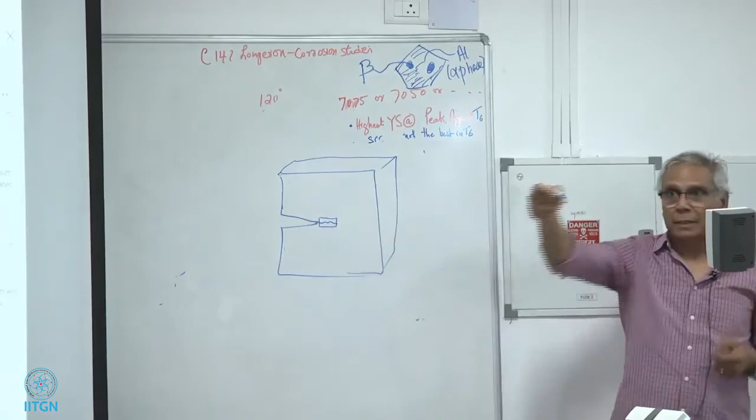Can we borrow your epoxy patch? We'll borrow your epoxy patch for that repair. We can put it on either both sides or one side. We'll use Dr. Shinde's epoxy patch, and then we can do stress corrosion cracking test now. Maybe we should put the patch on both sides.

Or you can take a center crack panel. So anything, I'm just putting something here, just to illustrate that you don't even have to have the epoxy patch. You can just have a regular crack also, and do that kind of test. Oh yeah, unload this.

Load this, put a load on it. Dead load. Put a dead load on it, and see how the crack will progress, and we plot stress intensity on the x-axis, dA/dt on the y-axis.

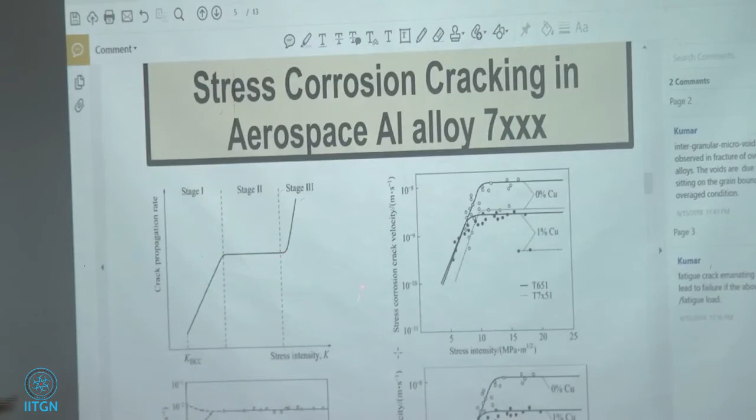So normally the books will tell you that you're supposed to get 3 regions. Region 1, stage 1. Stage 2, the plateau region - the crack is still moving, but dA/dt is constant. So if you plotted A versus time, the crack is still moving, but the slope is a constant growth rate. This is the stage 3, fast crack growth rate.

So this is ideally what is supposed to happen. There is a guy called Marcus Speidel who did a lot of work from Switzerland back in '73 or something. He did, can't imagine, he just did for 3-4 years the same work. So here he compares 0% copper, 1% copper - effect of copper on the stress corrosion cracking. There's a big difference.

What was the tool that you used? Here. Okay, so Marcus Speidel, S-P-E-I. Classic work on 7,000 and 2,000 series aluminum.

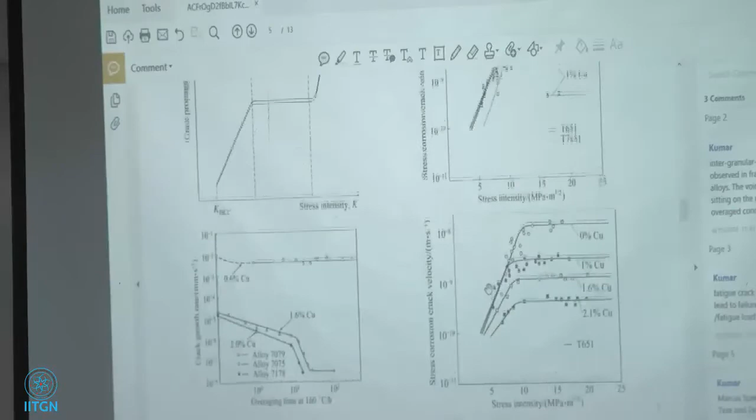Yeah, he has. Yeah, the previous one. Yeah, so he has kept the temper constant. Oh, I see what you're saying. Okay, yeah, sure. Oh, yeah, so yeah, you're right. So the dark lines are T6 and the dotted lines are T73, T751, T7351 or something. So T6 is your peak aged and T7 is your over aged. So he has taken that sample, put it in the furnace and aged it for a little bit longer time, and he got the over age temper.

Okay, beautiful work. Yeah, it's known all over the world. This guy did a very nice piece of work. Got a lot of patience to do this work in a very systematic way. You know, a lot of times we're afraid of spending so much time on a project. We have other things to do.

Especially the guys, where are the Bharat Forge guys, you know? They have other things, meetings. How many meetings do you have every day? 2 to 3 every day. You're in the middle of your work and somebody has a meeting to go to. But that's the way it is, life, right?

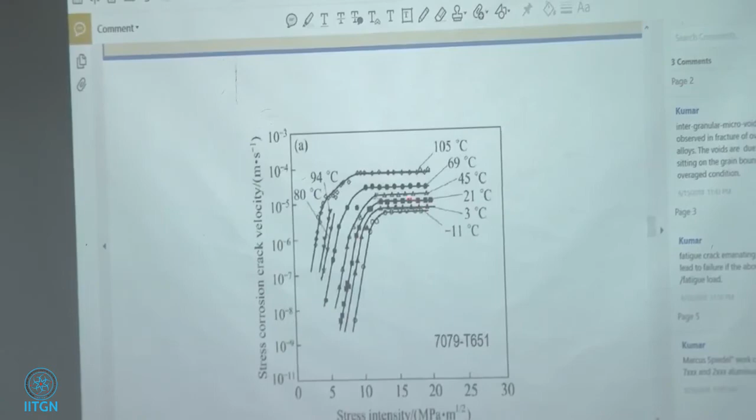Minus 11, 3, 21, 45, beautiful. But look at how fast the crack is growing: 10 to the minus 4 meters per second, multiply that by 10 to the 3, it's 0.1 millimeter per second.

Right there in the top, right there. That's 10 to the minus 4 almost, right? Times 10 to the 3, that's meters per second, that will give you millimeters per second. That's almost 0.1 millimeters per second. It's running, the crack is running even at this low stress intensity of 5 at that temperature in this material.

They don't use this anymore in the aircraft, but they used to use this at one time. K1, this is K1 SCC. When you say K1 SCC, that's a threshold, right? So these are all K1 SCC, like at 105 degrees Celsius, this is the K1 SCC value. But this is stress intensity K, at 105 degrees. But it's stress, not fatigue, it's just stress intensity. If it's fatigue, it will be stress intensity range. That's what you have to look for, the word. Range would mean fatigue, if there's no range, it is single.

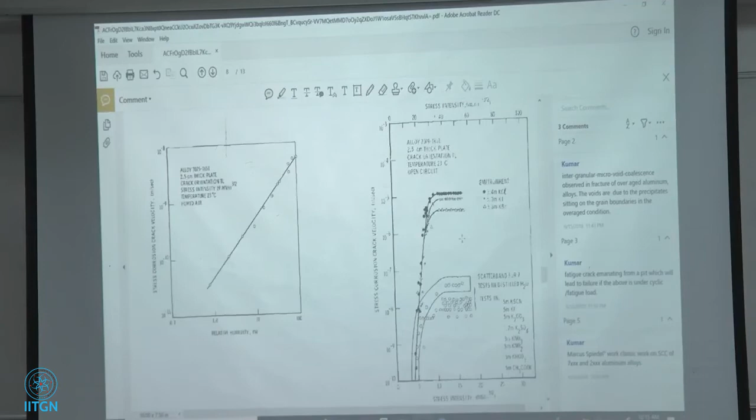Anyways, this is a thick plate, 2.5 centimeter thick plate, 1-inch thick plate. But look at here, this is iodide, I think. Yeah, iodide and bromide, I don't know. Anybody interested in the iodides and bromides and chlorides? Okay, so you're interested?

This is the short transverse. I can't read it very well, and I don't think you can read it either. You need to retype these things in. We need to retype these things. So this is short transverse SCC, okay?

So this is the thickness direction of a plate. That's where the weak points are. The weak link in this material is in aluminum alloys. A lot of times when it's a thick plate, if it's a sheet, there is no problem, but if it's a plate of aluminum, you have to make sure you understand this very well. So this is through the thickness.

Oh okay, we'll just use it here. So the grain boundaries are like this, basically. Okay, you're loading it like this along the short transverse.

Let me tell you something about the designation. In these kind of specimens, if I don't put a designation, you will never know where I took the specimen on a plate. So what I'm supposed to do: if I put S, that means my stress axis. The crack is growing along the second one, crack growing along L direction.

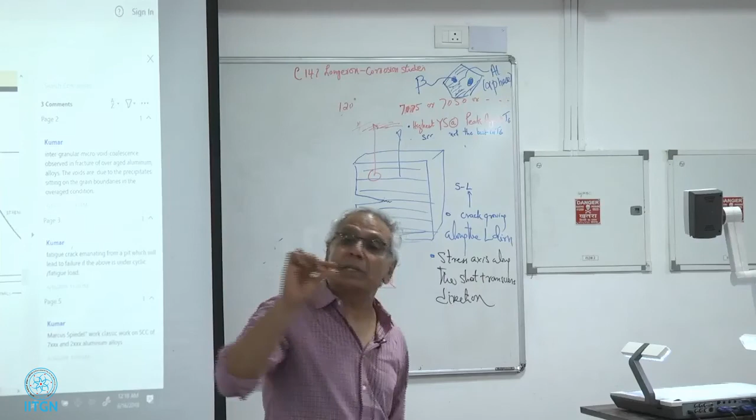Okay, the stress axis or the loading axis along the short transverse direction, S direction. It's very, very important to mention this, especially if you're working with a plate product. If it is only this thin, it's a sheet product, but if it's this thick, it's a plate product. If it's a plate product, it must be mentioned, very important.

Because this is the, so that means I have taken a specimen like this. That is that specimen. So if I take a specimen like this, for instance, let me put just arbitrarily something. If I take a specimen like, well, let me make it a little easier for us.

So let us put the stress axis, that way is fine. Crack is this way. So in this case, this is the S direction. Let us say this is the transverse direction, and let us say this is the L direction. So this is my S direction, this is my T direction, this is the L direction, and this is the S direction. So the stress axis is T, and the crack is along the L direction. So this is my TL specimen.

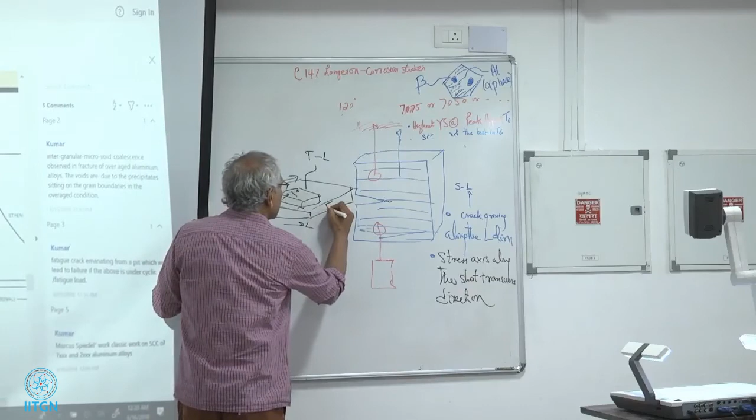Okay, and if I take a specimen here, S direction is my stress axis, crack is transverse direction. Although my drawing is not the best, but it is okay, right?

So the first symbol is the stress axis, the second symbol is the direction of the crack. First symbol - I didn't write that down. Oh okay, I didn't write it down. So first symbol is loading axis direction, loading axis direction. Second symbol, crack growth direction.

So if I take an SL specimen, the stress axis is along the S direction, crack growth is along the L direction. So this should be the case: S direction is my loading, L direction is my crack growing. If I want an LS - no, well that will be tough. No, it won't be tough, but LT, for instance.

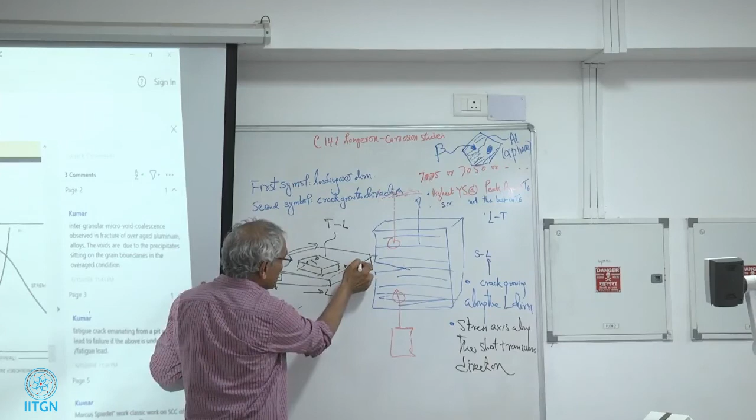If I say LT, that means my stress axis should be along the L axis, which is this, my L axis, right? L. Okay, that should be my - the loading should be along this direction. Okay, and the crack should be along the T direction, T direction. Okay.

So loading along the L direction, of course I'm not - L direction. My T direction is this. So my first symbol is the loading axis, and my second symbol is the direction in which the crack is growing. This is what we follow for the fracture mechanics samples.

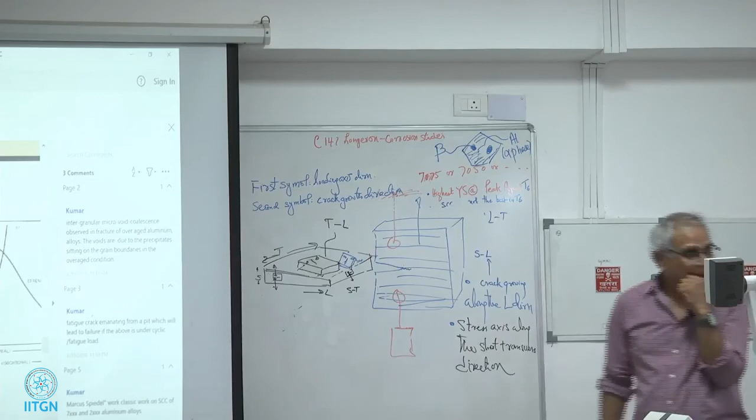If you don't give this, then we're in trouble. L is rolling direction, yes. S is the short transverse. T is the long transverse. So this is the designation that we follow.

It's not the best drawing in the world, but I'm hoping you get that picture. What is the difference - no, what is recommended by standard, or to find out? Yeah. Exactly, yeah, yeah.

So if you're in your case, you want to check the LT sample - the loading direction along the plane of the roll, along the direction of rolling, and long transverse is your crack direction. But if it's a thick plate, the industry is always worried about toughness when loading this way, because that's the Achilles heel for a plate - it's the weakest orientation. If this is K1C of 4 and this is K1C of 30, I would be scared about that 4 in my design. I need to bring it up to at least 12, 14, 15, something. If it's 4, I will be worried.

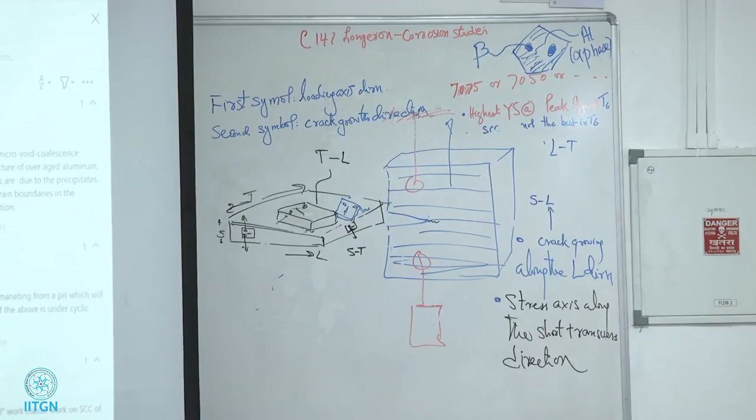So if I come to you and say, I got the greatest aluminum plate in the world, I'd ask: what is its short transverse toughness? Tell me what it is. And if you tell me 4, I'd say go back home, do some more homework, then come back.

Yeah. Yes. Yes, they should, they should. For thick plates, they should. And even for thin sheets, yeah.

Yeah, so you want to know that spectrum - the lower band and the upper band. If you can live with the lower band, that's fine, no problem, you can live with it. If you say I'm never going to encounter the short transverse direction in my application, then you don't worry about it.

So if I'm making an antenna out of a plate, and if my antenna direction is not the short transverse direction, it will never actually be, because I cannot have such a thick plate anyway - I don't have to worry about it. If I take an antenna out of an aluminum plate, oriented like this, I'm not so worried about it. But even then, better this way, or that way, okay?